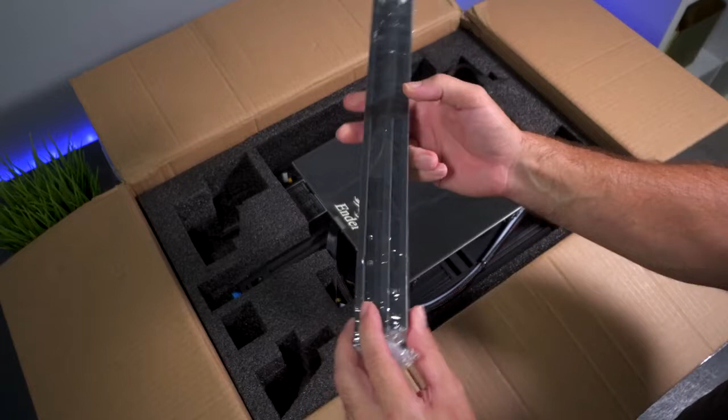All right, here we have our couple of 2020 channels. One of them is our X-axis channel, and the other one is the top brace. And here we have the hot end, and the hot end looks quite different, especially this cover here.

And we do have a silicone sock. Very interesting design, definitely looks like it would be a little bit harder to get into this thing if you wanted to. All right, for the next part it looks like we just need to take out this whole base, so the hot end is tethered to it. Try to carefully pull it out of there. All right, and that looks really nice, it's built very well. I'm gonna put this to the side for now.

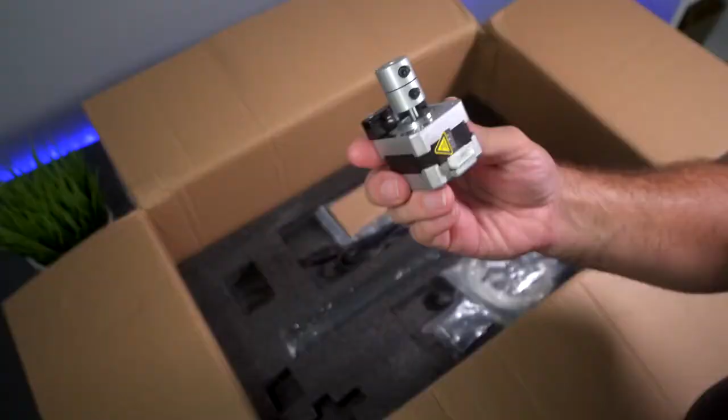I'm gonna take a closer look at it in a bit. Let's see what else we have in the package. We have another layer here of foam, and underneath we can see the rest of our pieces. So we have the Z-axis motor, and the coupler is pre-mounted. Looks like some hardware, our end stop switch for the Z-axis, some samples of filament, a belt, and the extruder knob, that's nice that it includes that, and a few more other things in there.

Here we have a bag of tools, some zip ties, snippers, and all of our wrenches that we're gonna need. A US power cord, the X-axis bracket, a small spatula which is not sharpened, but I don't think you need one for the bed that this printer has.

Well, it looks like a belt tensioner bracket that we'll have to install. And last but not least, our channels, and inside the channel there is our Z-rod, so it is inside this rubber protector. And the last part here is our two vertical channels, which is part of our gantry. And that appears to be everything for the box.

And here, guys, we can see all of our pieces, and this shouldn't be too hard to put together. So if you have any experience assembling anything, this should be straightforward. Now, at the same time, if you've never assembled anything before, this might be a little challenging. But we're gonna go step by step, and hopefully this video will help you.

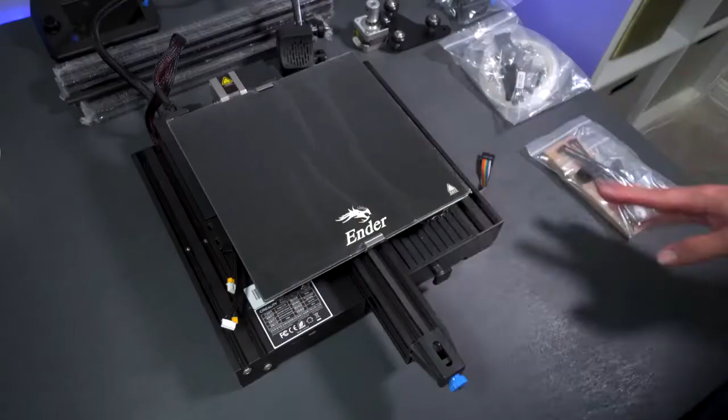But before we do that, let's take a closer look at the base. So you guys can see we have the build plate on top, and it is an ultra base type with little dimples on it where they heat up and grab the filament, and then as it cools it releases. So this is definitely a nice little upgrade here.

Some people prefer the Ender 3 Pro's bed, which is a magnetic bed that you just peel off, and it's definitely very easy and convenient, but those degrade quite quick over time if you print a lot. So this should last a bit longer and be more durable overall, as long as you don't scratch it too hard.

So there's two clips here on each side. I'm going to go ahead and take those off. They just slide right off, and that's what keeps the bed in place, which is quite interesting.

So I'm just going to move this out of the way because what I want to do is flip the printer over. And the reason for that, check out what's under here. Right off the bat, guys, you can see this is very, very well made. You can really see how Creality has upgraded everything over time.

So we have our power supply here in the back, and it's completely encased. Here we have a drawer, which is included with this printer, and we're going to open that up a little bit later. And here we have a cover where the electronics are. So let's go ahead and open this up so we can see a little closer what's inside.

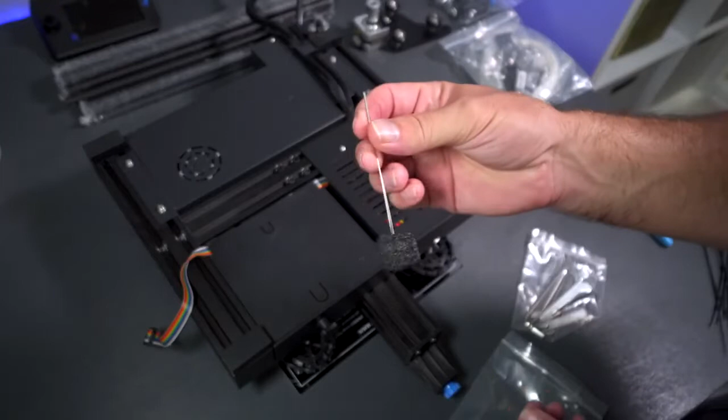So I'm going to grab my tool baggie, which has some snippers, a few zip ties, and a clean out needle. This is if your hot end gets clogged, you can use this needle to clean it out. And it looks like we have a little flat screwdriver, a few Allen wrenches, and a couple regular wrenches.

I'm going to grab a wrench from here, and we're going to unscrew these 3 bolts from this cover. And there's actually another bolt on the other side, right over here. So once we get those 4 bolts out, this lid should just pop off, and we can see that there's a fan that cools off the board.

So here we can see what the board looks like. So everything is very nice and tight in there. Looks like all of our stepper drivers are synced, and they are not removable.

And it looks like we do have an ARM processor, Creality logo, and the version 4.2.2. Yeah, so everything looks very nice and tidy, and usually Creality does a great job of tidying everything up.

A little nervous about this area here because these are very sharp edges from the cut, and the wires are kind of right on them, but they do have protection, so that should be all right.

And we do have a fuse on the board also, and a large heatsink right here, and I think that's some kind of power regulator there. So yeah, this is what the Ender 3 version 2 board looks like.

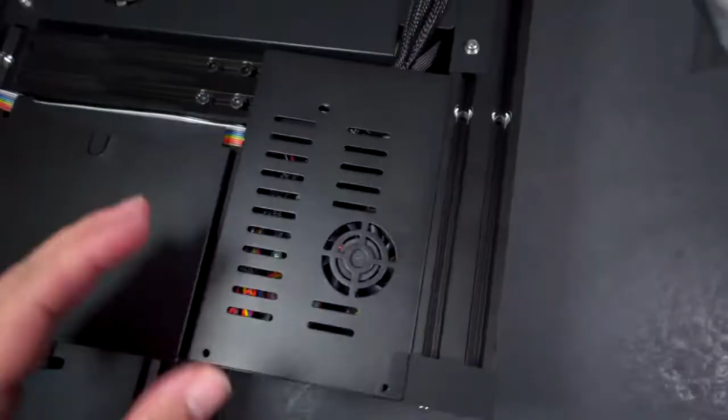Now it does feel a little tight in there. Adding any kind of mods might be a little bit hard. Alright, so I'm going to put this lid back on, and then we're going to flip it around and start putting it together. And also, guys, I wanted to mention about these feet. They're very nice. This is what Creality's been using lately on their higher end printers, and it's nice to see it here on the Ender 3.

Alright, so before we can continue with our build, we need to check a few things. Now, one of those things is the frame. Make sure the frame is sitting level. So if it doesn't wobble around side to side, that means it's quite level. Now, if it does wobble, what you want to do is untighten these bolts on each side, and that'll let it go to where it's flat, and then we can tighten them up.

But in any case, we want to go ahead and check all these bolts also. Make sure they're tight, because over time they do loosen, and they loosen quite a bit. Like this one was very loose.

printer is, the less problems we'll have in the future. Also, what's quite important, if we flip the printer around, you can see there's 4 bolts right here. These 4 bolts hold the y-axis. So if these are loose, your whole y-axis could move around. Because it's pivoting here, there's quite a lot of leverage on each end. So you want to make sure that these are tight.

So we're going to go ahead and check these. These are pretty good. And this one is completely loose. I mean, it wasn't even tight. Look at that, wow, that's crazy. This is why it's important to check this. This one is quite loose also.

Alright, so now that we know these are tight, we'll be confident that our y-axis here will not shift like this. The next thing you want to check is your bed. The bed has rollers that roll on the channel, and they're usually loose, and mine are loose. That's a good thing because you'd rather have them loose so you can adjust them right than have them too tight and wear out. And if they're too tight, they'll definitely mess with your print quality.

So we're going to grab this wrench, and hopefully you guys can see, but there are rollers right here. There's 1, 2. These are stationary, so they're not adjustable. But if we go to the other side, we can see we have eccentric nuts on this side, and this is what this wrench is for. What we're going to do is stick our hand in there and feel which roller is loose. It feels like it's that back one right there.

So what we're going to do is grab our wrench and turn it just a bit, and that should tighten it up. Okay, and that actually did tighten it up, and it seems to be about right.

Now, the way I like to check these, if you stick your finger in there and spin the roller, you can feel how much tension it's pushing on the rail. So if you twist the roller and it spins on the rail and you can feel the friction, that's how you tell how tight they are. If you can't spin the roller at all, it's way too tight. If you spin it and the drag is quite heavy, then it means you need to loosen it.

So what you want to do is get to the point where the drag is quite light, and at the same time the bed is not moving. As you can see, the bed doesn't move, but the motion is very smooth and easy. So if you feel any kind of jumpiness or anything funny, that means your rollers are probably too tight, or it means that maybe your belt is not running true on these pulleys. So we also need to check those.

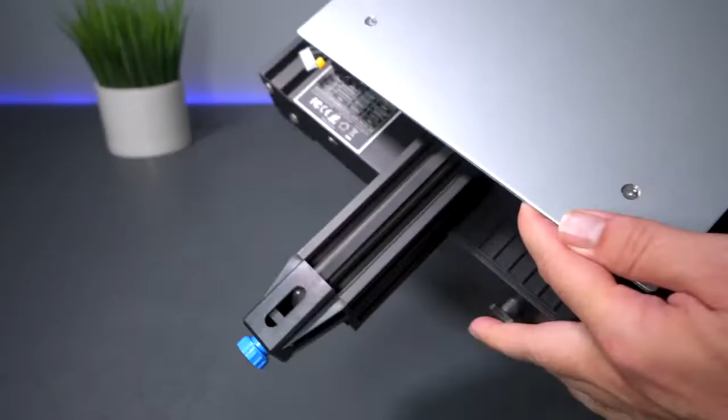Speaking about the belt, I can see here on the front we are definitely not running in the middle. So the first thing I'm going to do is try to loosen the belt completely so that it's loose. Then I'm going to go underneath the bed and make sure that the tab that goes and hangs onto the frame is all the way across where it needs to be. I'm just going to use this larger wrench and push it over, and also check the other side.

So now I'm going to tighten the belt, and we can see the belt is running a lot more true, basically almost right where it needs to be. So adjusting all these things will help the overall experience of the printer.

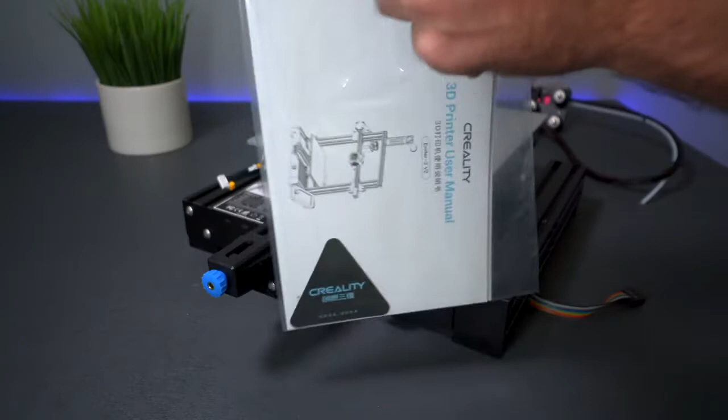All right, so I think it's time to whip out the manual. It looks like we have a few more things in there. There's an after sales warranty card and how to contact the company, and it looks like a little thank you note.

All right, so let's see what the Ender 3 version 2 manual looks like. Compared to the old days, Creality has moved up quite a bit in how they provide the information, and it's all very nicely laid out. So here we can learn about the printer and what all the parts are.

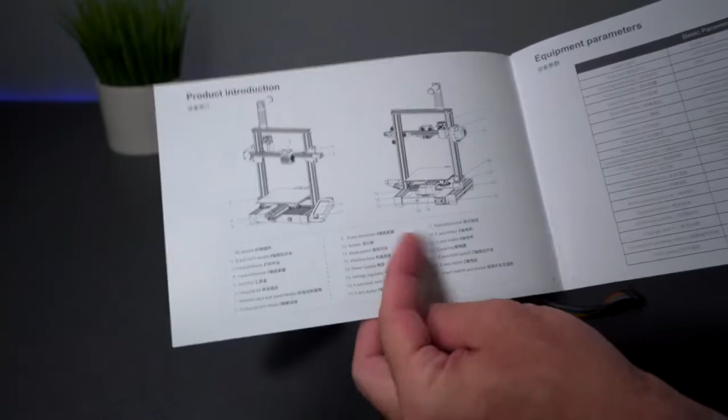Here we have the basic parameters, all the pieces that are included. You can see there's quite a few of them.

All right, and here we have step 1. Out of curiosity, there are 9 steps to building the printer, and then step 10 is bed leveling.

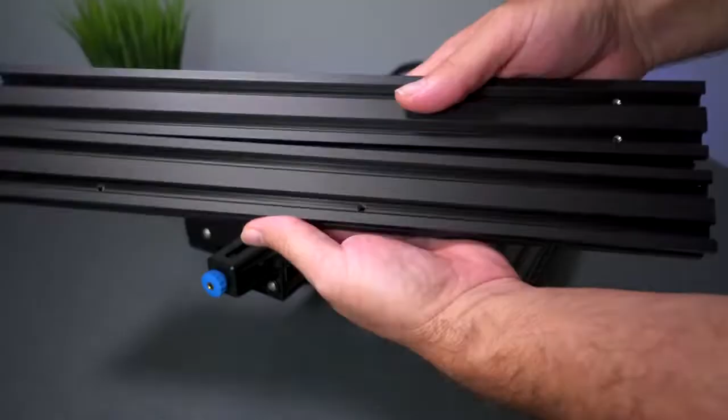For step 1, we're going to need these larger channels, and they are plastic wrapped. This is what they look like. They're actually 2 different channels. As you can see, there's 2 little holes here on the side, and then we have 2 larger holes up higher on the other one.

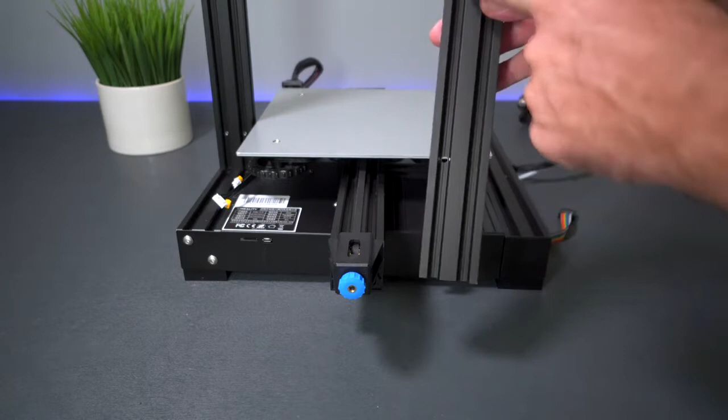If we look at the picture here on step 1, we can see the one with the 2 holes up high goes on the right side as you're looking to the front of the printer, and the other one with the 2 little holes goes down on the left side. So the one with the 2 little holes will go on this side, and the 2 separated larger holes on the right side, with the holes on the inner part of the channel, to the inside.

Let's grab our hardware that we're going to need in this bag. We have the Z-Axis switch here, and we're actually going to need this in this step also. Let's take a quick look what else is in this bag. We have some caps for the profiles, M5 T-nuts, our micro SD memory card with a USB adapter, some more bolts, and the ones we are going to need right now, which are the M5 45s, a couple PTFE tubing couplers, an extra nozzle, and some clips.

A belt for our X-axis, an extruder knob, and this is a nice little touch - it goes on top of the extruder so you can visually see it turn, and also turn it manually, kind of like a little knob. Very nice. And of course we get a little bit of sample filament that looks like to be white PLA. But we are after these M5 45 bolts, and we need 4 of them, but there are 5, so I'm not sure if that's extra or needed somewhere else.

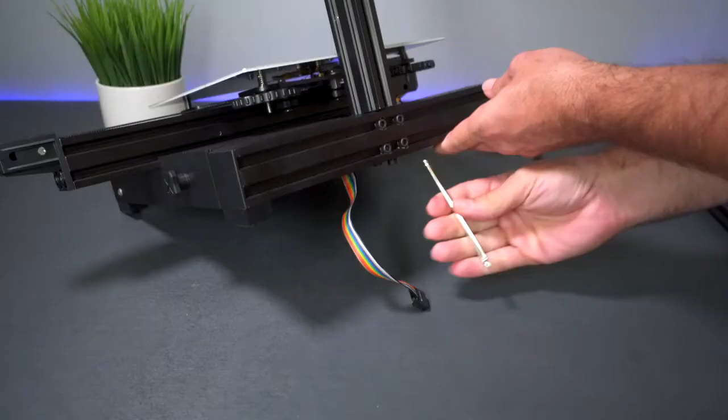We'll find out. So I'm going to remove one of the channels, and we can work on this one. What I'm going to do is put a bolt through it, put our channel in correctly like this, and start the bolts with our hand, and do the same for the other one. Grab our wrench. What we want to do here is just snug them up and not tighten them at all.

We actually want them a little loose. This is quite important because we're building out the whole frame on the upper gantry, so we want everything to be aligned correctly. I just barely snugged it, and you can see the channel still moves around back and forth and twists around. And that's what you want - you want it to be moving around at this stage.

And we're going to do the same thing on the left side, the little holes down. All right, so we got this channel snugged up, but it's moving also.

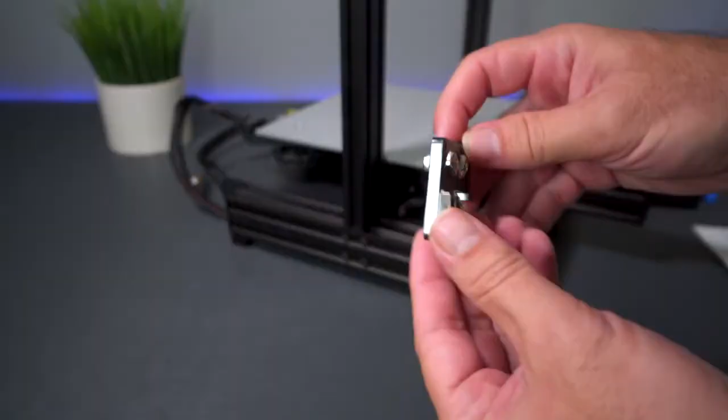So in the first step, they also want us to install the Z-Axis switch. This is what that looks like - it's in its own little separate bag, a little plastic bracket with the switch on it. If you look at the bracket, you can see there's a little nub sticking out. This part that sticks out is actually going to sit right here on top of the channel. So it goes in like this.

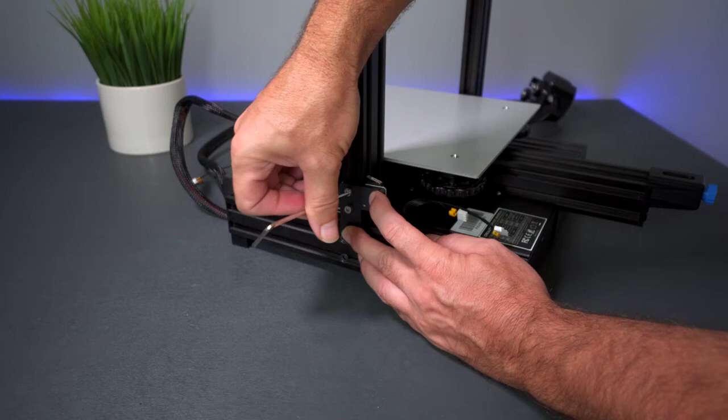There's a couple T-nuts we need to loosen up so they move around. We're going to align them up and down like this. We simply go into the channel, and go all the way down - there's a little stopper here that will stop it, and it'll sit right on top. Once you're all the way down like this, you're going to unscrew the bolt a bit and then screw it back in, and that should turn the T-nut inside the channel and lock it in. So this is our Z-Axis end stop switch.

So for the next step, step 2, we have the Z-Axis motor and rod. The motor and rod go just behind the switch here, right in the back of the channel. And here is the stepper motor, and we can see that the bracket's already installed on the back of it.

And so that simply just goes right here, and the two little holes are for mounting this motor. So we will need two M4 18 bolts, and the bolts will go through the bracket and then into the channel. Now the motor does sit a little bit off the bottom.

Now here's something to consider. If you tighten these bolts all the way, you might tighten them where the motor ends up sitting a bit crooked, because it does fluctuate quite a bit on all these parts. You want to make sure that you're not leaning side to side anywhere.

That leads us to our next step, which is putting the lead screw in, and that'll simply go into this coupler just like that. Tighten up this little bolt here, that'll compress the coupler and hold the lead screw. So let's go ahead and tighten that up.

Now the best way to line this up, what you want to do is just eyeball it here where it's level as possible to the top on this channel, and if it looks pretty close, just tighten it right there. As you tighten it, it might move, so keep an eye on it.

Alright, so our Z-axis motor is on and the lead screw is tight on the coupler. Make sure both of the bolts are nice and tight.

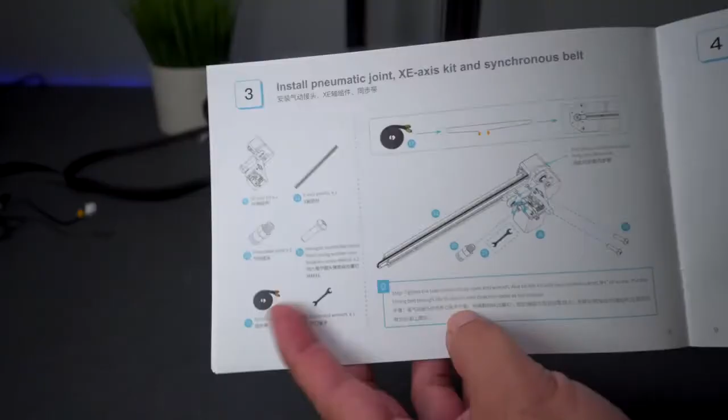So for the next part, we're going to move the printer out of the way, because on step 3 we're going to be building the X-axis assembly. We're going to need one of these 2020 channels, and there are 2 of them. One of them has a bunch of holes, and the other one just has 2 holes on each side. That's the one that goes on the top of the printer.

But this one here, this is where all of our parts to the X-axis will go on. So this is where we're going to use our extruder/X-axis assembly. We'll also need our belt, and we're going to need our M4 16 bolts. And now we can put this thing together.

So it might be a little confusing, even looking at the manual, because it is a little strange how this whole piece goes together. The best way to know which side goes where is that if you look at these little holes, the 2 that are closer together go to the assembly, and the ones that are farther apart go to the idler bracket on the other side.

So this wallowed out area here with the 2 small holes actually fits over this bolt right here. If we take our channel and go down onto the bolt, you guys can see that. I'm just going to go down just like that, and then these 2 threaded holes will accommodate 2 bolts that will go through here. So let's grab 2 of our M4 16 little bolts.

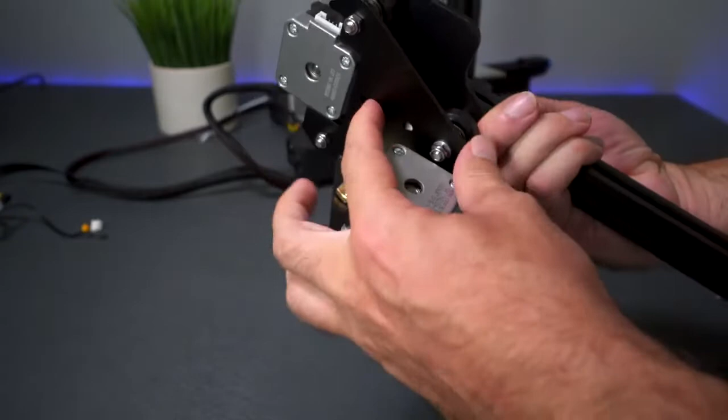There's no easy way to do this, but the bolt goes through here, and you can fit a wrench on the other end. I find that if you put the bolt through the hole first, like this, put both of them through there, grab our wrench and go through the outside here, put our channel on there, and then try to start it.

So this part could get a little finicky, but if you have a little bit of patience, it should go pretty good. And then I'm going to go ahead and tighten up the bolts really good. And that's how that piece goes on.

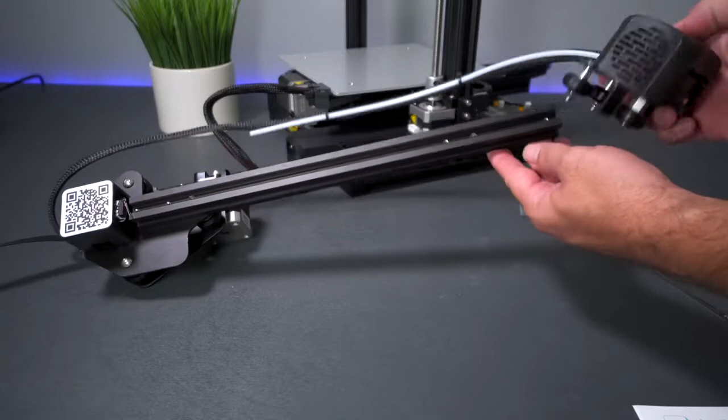So for the next part, we're going to take our hot end assembly that goes from the printer. Make sure your wires are not tangled or anything, and they're pretty happy where they are. We're going to point the tip to the bottom, and we're simply going to roll it onto the channel, just like that.

And now, working on this side, we have this bracket, and these 2 holes here are for bolts for these threads. If we flip this thing around, we can see there's another wallowed out area, and that's where this bolt fits in right here, just like that.

And here we can see where the 2 M4 16 little bolts go in. So let's go ahead and tighten those up, snug. And this is how the bracket mounts.

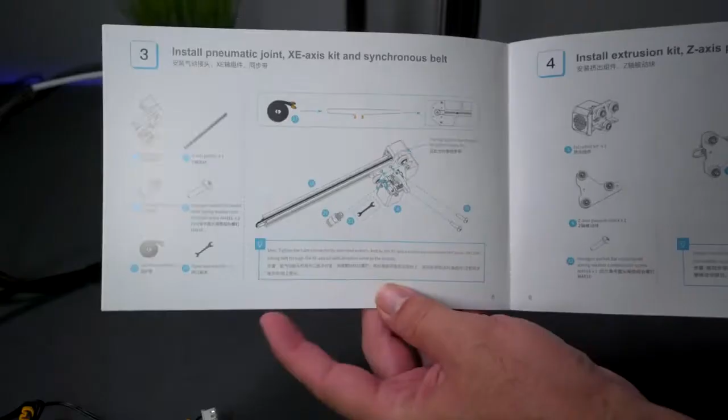Alright, so this is what our X-axis assembly looks like so far. It's not very hard to build, a little bit confusing on how to install the parts, but as you guys can see, not something that you can't do. So we've done step 3, we've pretty much done step 4.

So for the next part, let's go ahead and install our belt. This is not as hard as it seems. You're just going to grab one end of the belt with the teeth pointing down, and we're literally just going to put it right in the channel like this.

So then what we're going to do is take our hot end and run it over, just like that. When we run it over, it's going to be underneath the wheels of our hot end. Then we're going to feed this thing all the way through into our X-axis motor, and we can see it comes out from the top over there.

So now we need to grab it, and we're going to pull it out a bit. Then we're going to loop it back around underneath the sprocket, and it's basically going to come out at the other end here on the bottom. Not very hard, just go around the sprocket. So now we're looking at the bottom.

Here on our hot end, we're simply just going to go into this slot right here, just like that. So now we can pull on this other end, and that should tighten it up. Looking back on the top, this is just going to go around and then back to itself right here.

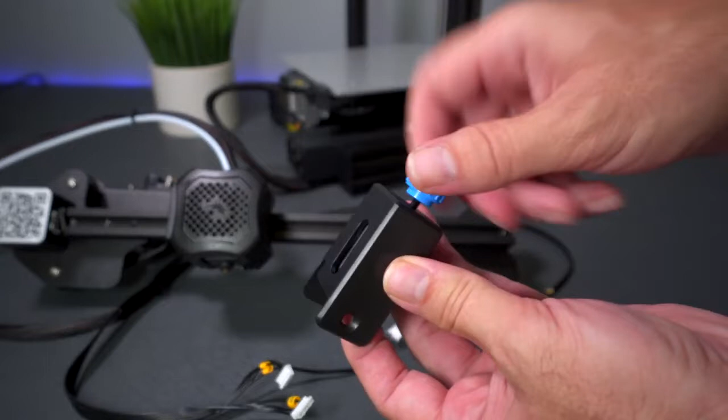But we can't do that yet because we have to install our idler tensioner here, and this is this piece right here. This tensioner pulley actually comes apart if you unscrew this knob here, and I think this is probably the best way to do it. If we unscrew it and just push it through, it should come out, and you guys can kind of see what that looks like. It has a little rail system that it slides into here, so you can't really get it wrong putting it back together.

So now we're going to take our belt and just go through the idler pulley. Before connecting the belt to the hot end, we need to go ahead and reassemble our tensioner. The way this thing goes, the smooth area here is the front, this is the top, and the longer slot is the back. So it's going to go in just like that if you're looking at it from the front.

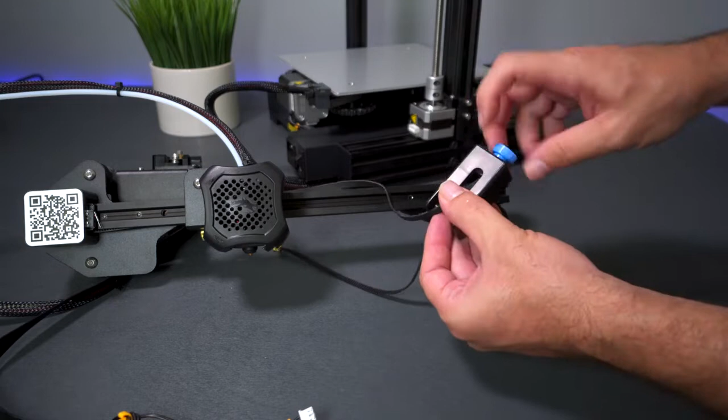Now you will need to take this bolt out if you went ahead and put it in, because this bracket here goes right over it. So what we're going to do is grab the idler and simply slide it back into where it was with our belt in it. Put our little knob on so it doesn't fall out. We're going to leave that quite loose for now, so we have plenty of room to work with.

And now we're just going to simply slide right over this channel here. There was a little bolt that was included with the pulley adjuster, and that goes in the front, so let's go ahead and tighten that up. Then our original bolt goes back into here, and we're going to snug that up, but we don't want to go crazy tight because we have plastic here. That's how the idler pulley goes on.

We're going to go around to the hot end and hook the other end of the belt into the slot, just like that. We want to tug on them just a bit to make sure they're set all the way down into the slots.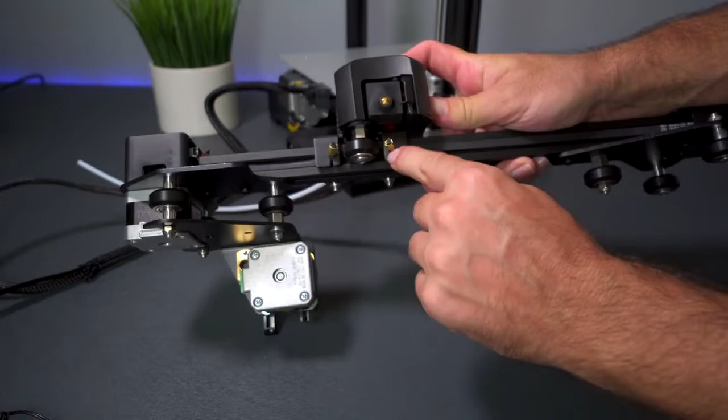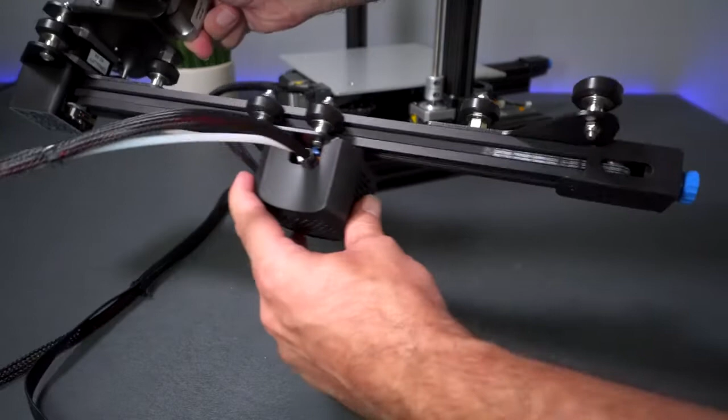So now our belt is on and we can go ahead and tension it up a bit. You want to be very light on this because you can't really tell how much you're tensioning it. Always feel the belt and make sure you're not too tight. Like I already have it too tight and I didn't even really know that from feel. So we want to run this back and forth and make sure our belt is running true on our pulleys.

So this is how the X-axis assembly goes together. We're going to grab it. Now you want to make sure none of your wires are twisted, so you may have to twist this thing back and forth, but mine looks about right where it is. These rollers here will simply go over the channel, so let's go ahead and feed them in.

Now we still have our lead screw, and we can see it right here. We need to feed it into this brass bushing, so we're simply going to line it up and then twist it here at the coupler, and we can see how it walks right in.

So making sure all of our stuff lines up, we're just going to go straight down. We can go ahead and push on this and it should go pretty straight, and here you'll be able to tell if everything is lining up really good or not.

For the next part, we're going to be installing our brace that goes up here, and we'll need our M5 25 bolts, 4 of them. If you look at this channel, there's a wallowed out part that goes to the top and the normal end goes to the bottom. That wallowed out part is for the bolt to fit in.

What we want to do here is just barely snug it. We want it to be loose still, because right now we're at a critical point where our whole frame, or the top gantry part, is adjustable, and we want it to sit in the most natural place where it wants to, where there's no binding.

Now we can really adjust everything correctly because our bottom channels here are not tight, so it's all still moving. The top is not tight, so the space between these brackets should already be automatically adjusted since we're all the way down. We need to check our wheels, make sure they're more loose than tight, so nothing's under strain.

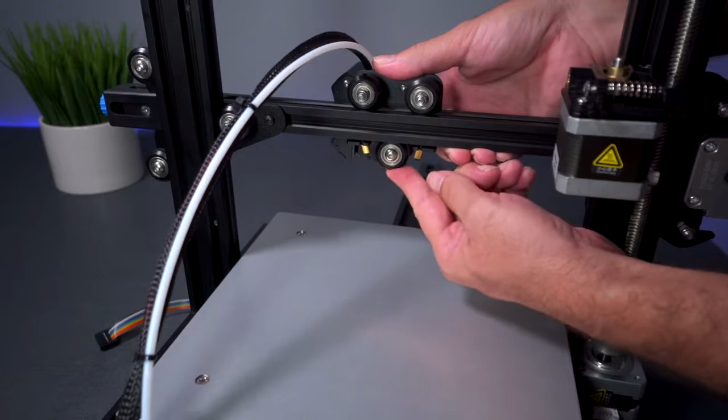So if you do need to adjust it, the eccentric nut is underneath here, and you just spin it a little bit back and forth until you get just a light drag of all the wheels. When you move it back and forth, it should have a very smooth motion — no jittering or any kind of jumping, it should be very smooth.

So we are on step 7, and we've installed the top brace there and adjusted all our wheels. On this same step, we actually installed the display, which we have right here. There's a bracket here in the back and it looks like it does pop out — that's interesting.

If you can see, there's 3 bolts with T-nuts going through there, and they simply connect to this channel here on an angle like this. We're going to grab a wrench and loosen all these T-nuts so they can move around, then line them up with the channel. These 2 will go on the bottom slot and the one here will go on the top, so I'm just going to go flush right here.

My panel will stick out a little to the front, but you can go as far back as you want or forward. So that's 2, and the third one. That is solid as a rock.

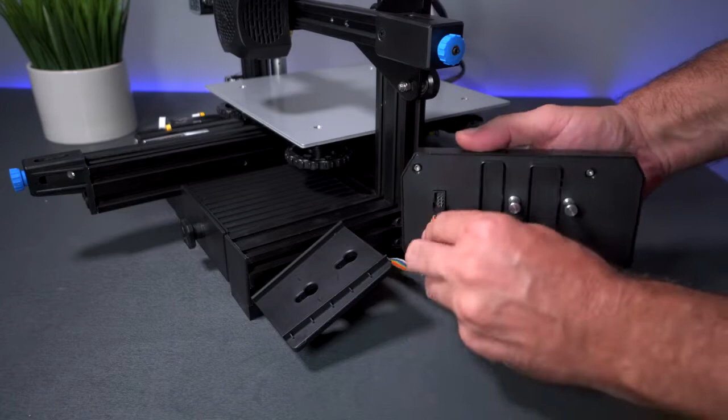Before we slide the display on, let's go ahead and plug it in. We'll simply plug it into the display like that, and now we can slide it back on just like that, and it actually clicks in. As simple as that, our display is on.

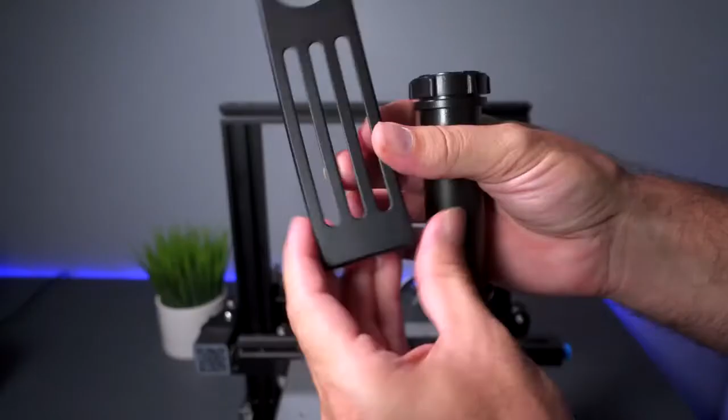So we got a couple more steps left. Step 8 is installing the spool holder, the profile covers, and the extruder knob. Let's start with the spool holder, which goes up here. The metal part faces backwards, so the nice part faces away from the front. Take the nut off the round spool part, thread it through, put the nut back on, and use your hand to turn the spool part so the nut tightens up. That's it. It's going to go somewhere over here.

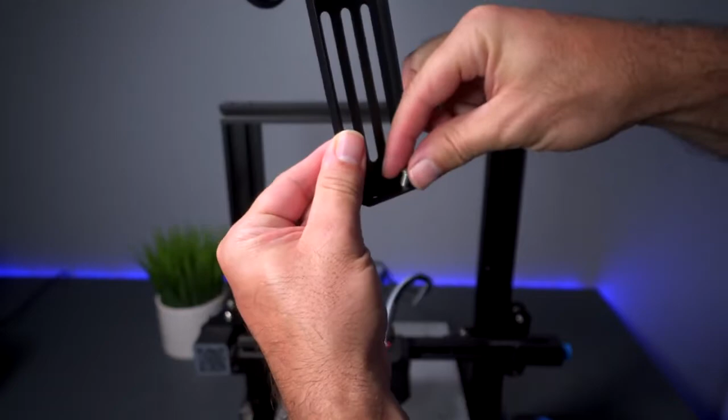Now we're going to set the T-nuts into the channel on top here, going as far as I can, and tighten it right there. We can snug these up, but don't snug them too hard because you'll damage the channel on the other end. This is what the spool holder looks like: the spool goes here, and the filament feeds into the extruder down here.

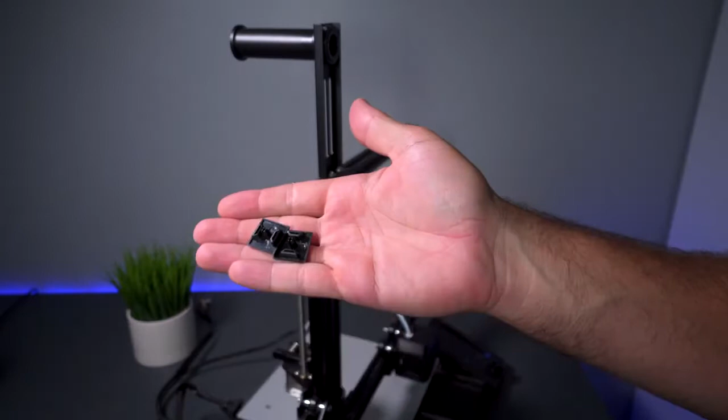While we're up here, let's grab these profile covers. There are 2 of them, and they go right here. There are sharp edges, and this is to protect the side so you don't get cut. These simply press on, and if they're not going on well, you can tap them a little and they'll pop right in. Same thing on this other side.

Looking nice. Here we're looking at the extruder. We need to go ahead and install a coupler. There are brass threads, and that's going to be a nice connection there. We can grab our wrench and tighten it up. While we're here, let's connect our PTFE tubing, simply inserting it into the coupler, whose job is to grab it and hold it.

Creality includes these little clips, a couple of them plus one extra, and you definitely want to use these. Spread these 2 pieces apart, then put this clip in here just like that, which ensures it locks in really good and the PTFE tubing won't be moving around.

You can go ahead and install the knob. If you noticed, on the bottom of the knob there's a little flat spot, and on the motor there's also a flat spot, right there. So line up the 2 flat spots and insert the knob just like that. Now we have a little knob we can use to push filament in and out, and while it's printing, this thing will be spinning so you can see that it's moving.

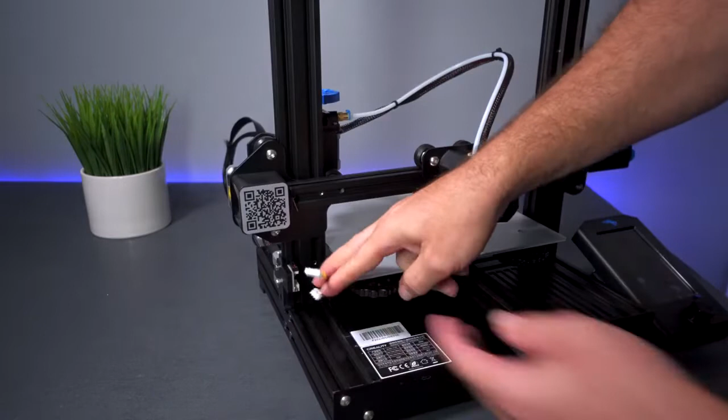We're really close to being finished assembling everything. The only thing left is to plug a few things in. Here in the front, we have a couple plugs: one is the motor, which goes to the back, and the smaller one is the Z-Axis switch, and they're labeled. There's a little yellow label that says Z on here. The switch clicks into here, and the motor wire we send to the back and connect right here. It's actually quite a tight fit, but it does reach, and that's how it goes.

So on the back of the machine, we have a few more wires.

Since our hot end is already connected, we don't really have to do anything there, but we do have this other flat cable here that comes out that has a few more plugs, and they are labeled. This one says E, X, and X also, which is a smaller one for the switch. The E is for the extruder, and that simply goes right here. And then the X, the larger plug, is for the motor, and that clicks right underneath.

But the X switch is actually inside this housing here, and you can maybe see it, but it's a little hard to reach, and it clicks in right there. So this is where all these wires go. And the wire that comes from the hot end actually has a little place where it can clip in right here, where it's kind of held.

But yeah guys, that's pretty much it. So all of our wires are already connected, so everything else is connected. And we're pretty much good to go, except for one thing that's very important, and that is in the back of the printer. You can see right here, that is the voltage setting.

Depending on where you live, you want to switch that to the right voltage. So I need 115 and it's on 230 right now. I'm going to go ahead and switch that. Make sure that you check this before you plug your printer in. It's very important. So yeah, that is everything with the assembly.

Now the only thing we got to do is put our glass bed back on. So the build plate is glass. There's a little protector on top of here. And we can see we have that ultra base style coating on it. And we get a nice little Ender logo here.

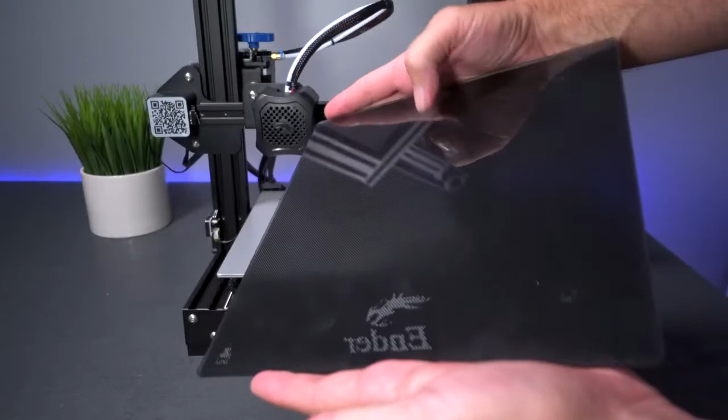So you do have a choice. You can print on this or you can print on glass. It has glass on the other side. So we're definitely going to be using the ultra base. I really like this stuff. When it's hot, it grabs the filament, and then when it cools off, it just pops right off.

Now the interesting part is these clips here. To me, this seems a little bizarre how the bed is held, but I guess we just clip it back on like that on both ends. And that should be good enough. It seems like it's holding really good. It's a little bit unusual, but in any case, seems to be fine. And it looks really, really nice.

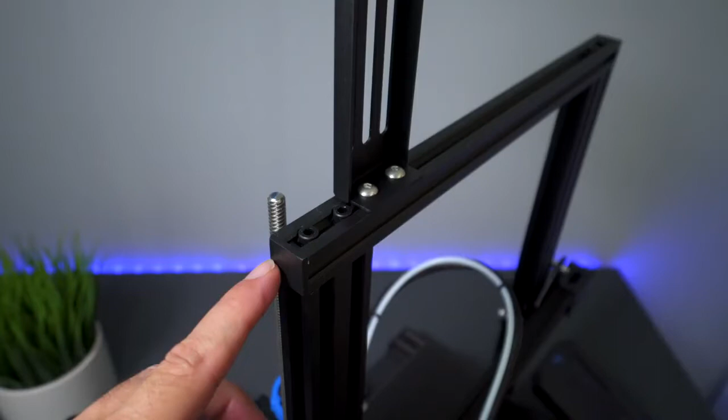So before we plug it in and power it on, let's go ahead and take a closer look at all the features. Starting up here on the top, we have the spool holder. I just realized that you could probably move it even more farther this way and put it in between this bolt right here. So I might do that.

So up here, everything's quite basic. We move to the back, we can see the lead screw just kind of hangs there. There's no support here. As we go down, we can see our extruder with the extruder knob and the motor underneath. And as we go this way, we have the X-axis motor.

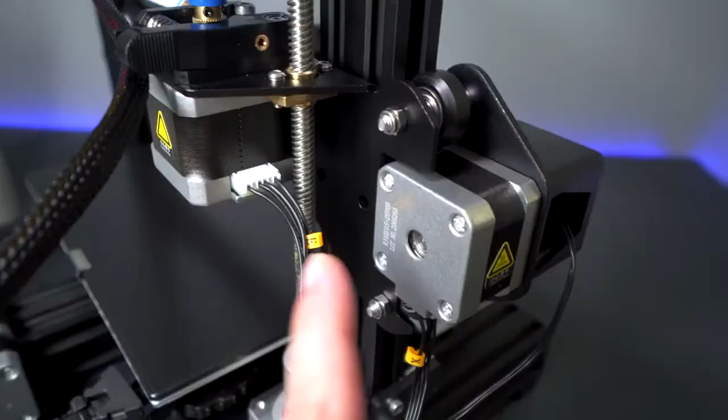The X-axis switch is in there. The X-axis rail with the hot end riding on it. And the X-axis tensioner over here. As we go down, we have the Z-axis motor and our switch that we installed. And at the back, we have the Y-axis motor.

And then there's this enclosure here that kind of hides everything, which is, I guess, good, you know, not to get anything caught in there, but not very good for servicing. Now, there is a little bolt right there that you take out, and all this comes off, and the Y-axis switch comes off with it. So good for safety, but maybe not so good for serviceability.

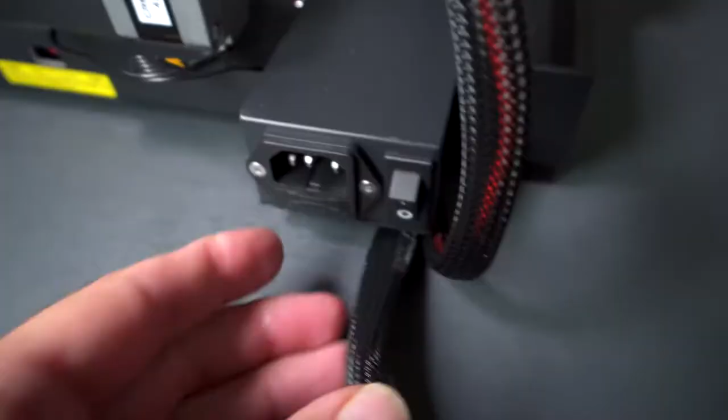And as we go down, we can see that's where our switch is for the voltage. By the way, the power supply is a Mean Well, and it's this whole piece right over here, so it's part of the structure of the printer. And over here we have the power inlet socket with an on and off switch, and the socket is fused. It's kind of an interesting design because it kind of protrudes out here to the very back, but definitely a pretty nice look overall.

So the bed is heated, and this is the wire that comes out of it. It looks like it's strain relieved somewhat, and the strain relief just hooks up to one of the legs on the bolt of the bed. And I like how Creality uses these cable protectors.

They're quite nice and premium feeling.

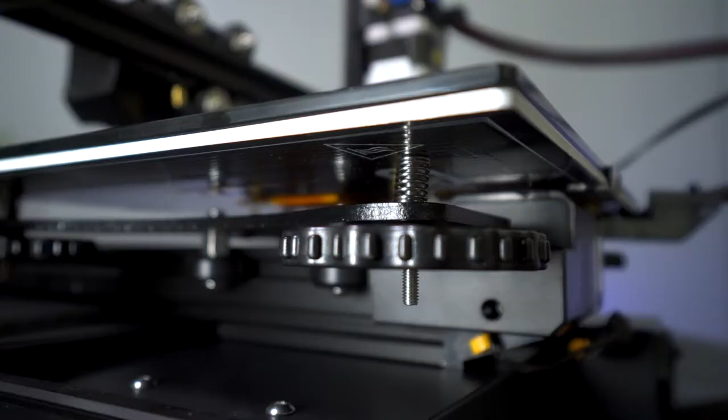So as far as the bed is concerned, we have the glass on top, then an aluminum sheet, which is the heating element underneath that. It's not insulated, but technically that's not really needed for this bed size.

So we have 4 large adjustable knobs. As we go this way, we can see we have the display here, with a cable running out from the bottom. And I definitely like this feature that you can pull it off, so this might be useful to some people.

So a pretty large screen on this display. We have a protector here, let's go ahead and peel that off, and we'll check out shortly what it actually looks like.

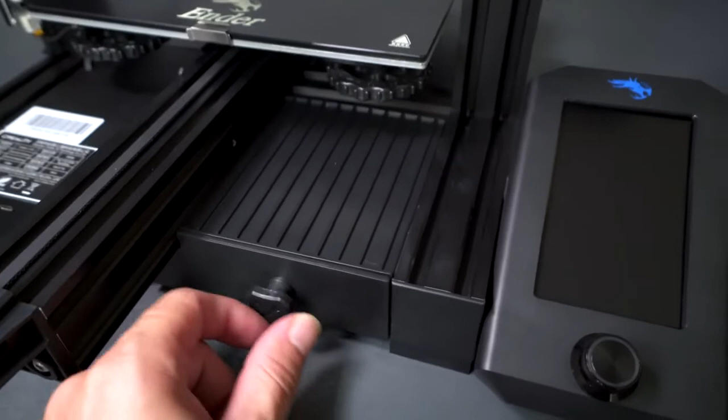As we go this way in front of the printer, we can see we have a little drawer here. The old Ender 3 didn't have a drawer, but you were able to print something to put in there. Here they included an actual drawer, and it's enclosed. You can store all your tools and little things from this printer, and it does completely come out, which gives you additional storage on the side and the back. There's a little nub that locks it in when you close it so it doesn't pop out. Very nice drawer.

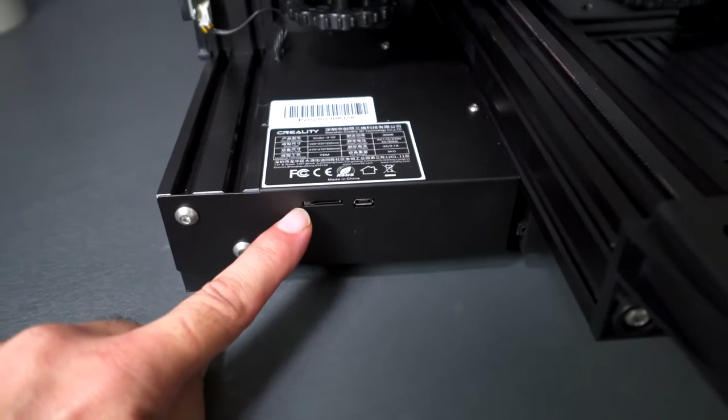As we keep going this way, we can see this is where we're going to plug in our micro SD card, and this is our USB connection. Just above that, we have the specs of the printer. We can see it's Ender 3 version 2, the power supply, and the print size, which is 220 by 220 by 250, and it weighs about 8 kilograms. So yeah guys, that's pretty much the printer, and as you can see, Creality really fixed all the issues the earlier version had, and even improved on the Pro version, giving us this version 2.

Alright, so let's plug our power cable in. Make sure your voltage is set to the correct setting. I'm going to hit the power switch, and we should power on, and there we go. We got a Creality logo in the load bar, and there it goes.

The next thing we need to do is home the printer and check to make sure all of our axes work. Before we do that, we need to run the bed down as much as we can, or a good amount, because you don't want your nozzle to hit the glass. Another way to check that is to push it down to the end stop switch, since that's where it's going to stop it, and you can look underneath to see if you just have an air gap, and we definitely have one.

Alright, so I'm going to use this rotary knob here to select prepare, and then auto home, and there it goes. All right, so it looks like everything is working, and there goes the Z.

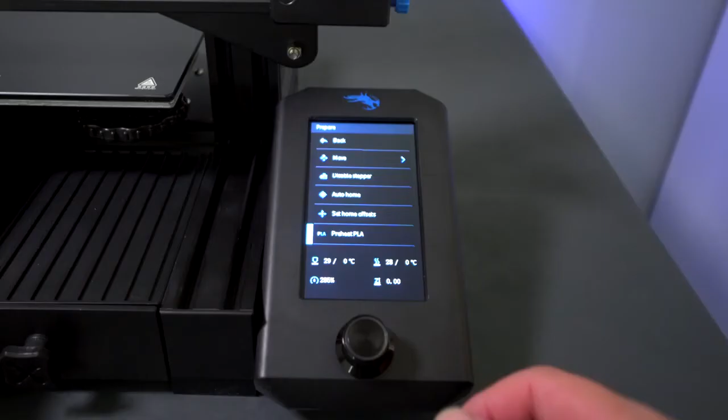So here, guys, you can see the display a little better, and it's very nice. I love this control knob, it's very responsive, not laggy or anything strange. Everything is very quick and laid out on this nice screen. On the bottom here you can see we have information, which is the hot end and then the bed. It looks like the speed and then the Z-axis, and I think that's fan speed.

So it doesn't appear that this printer has a leveling assistant, so that just means we have to level the bed manually. What you're going to do is go to auto home, and once that homes, you can go to disable steppers. When we do that, we're able to move the hot end. You will have to be very careful with the Z-axis coming down because it moves quite easily.

So you're going to need a sheet of paper, I'm just going to use this Creality thank you card. What we need to do is level the 4 corners. We're simply going to go to the corner, but you don't want to go all the way to the edge, and get that close. Then we go to the other side, get that close, and do the back corner, then go back to where you started. You want to do this a few times until it's all close, because every time you change it here, it changes somewhere else.

So you definitely want to go around at least 4 or 5 times. Now when you think you're really close, what you want to do next is preheat the bed and hot end.

So here under prepare, I'm going to click on preheat PLA, and we can see that's going to go to 185 on the hot end and 45 on the bed. So as that heats up, let's go ahead and home again, because we want to make sure we have the right offset on the Z-axis. Then we're going to disable the steppers, and as that's heating up, we should be able to get our final adjustment in, which is going to be very slight.

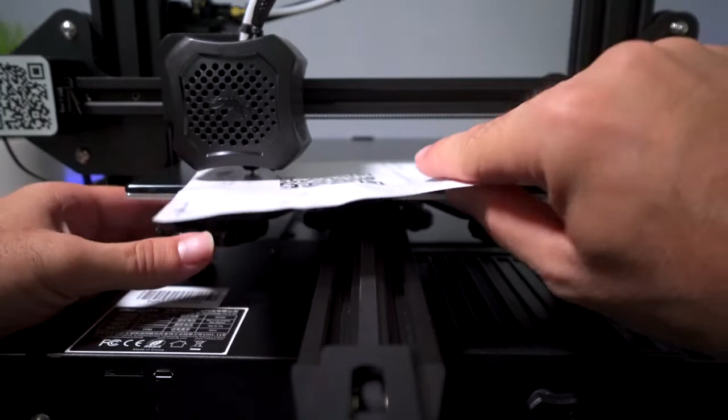All right, so the bed is hot and the nozzle is hot, and it looks like we have a very close measurement right here. This is roughly how you level the bed. Now take your time and do this right. Even if it takes you 15-20 minutes, just keep doing it. Go over and over again until you know that every corner of the bed is as flat as it can be, and keep homing it. That way your reference is correct.

So let's take a quick look at the display. This is the home where it starts. You have the Creality logo up here. Then we have print, prepare, control, and info. The way you toggle between those is you just rotate this knob, and you can see it all moves around. On the bottom, this information stays as like a little dedicated dashboard.

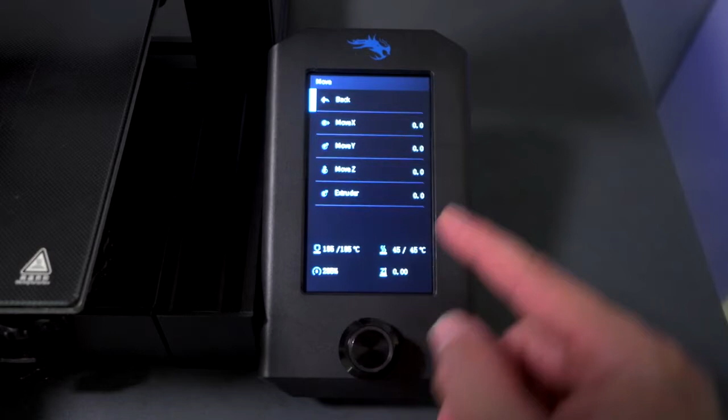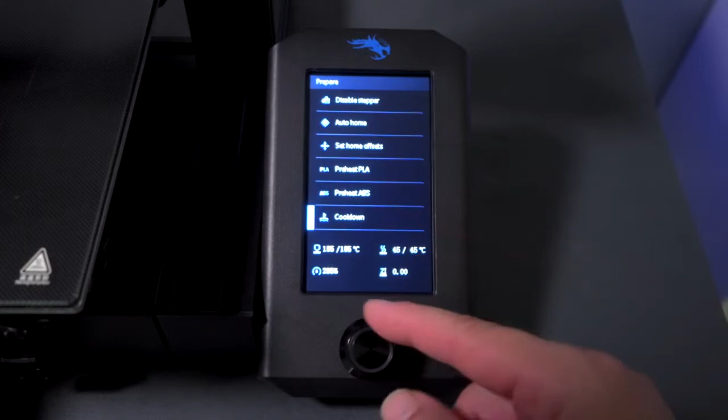So under print, this is where we're going to print our files once we insert our SD card. Prepare is where our tools are. So we have move - you can move all the axes, including the extruder. Disable steppers, home, set home offsets, preheat PLA, preheat ABS, cool down - this is going to cool down the bed and the hot end - and then language selection, which we have English here, or Chinese, 2 options.

So let's go back. Here we have control, so we can control the temperature. You can actually set the preheat settings right here, so for PLA you can adjust that as you want. So let's say we'll adjust the bed to 50 instead of 45. You can also set the fan speed here, and then we can save the parameters by clicking on the bottom. And that's it, so that's these options here.

So then we have motion, and here we can set max speed, max acceleration, max corner, and transmission ratio. These are more advanced settings, so if you know what you're doing, you do have these options. Store configuration, read configuration, and reset configuration - we're going to leave all these alone. Let's go back, and then we have info, and this is about our printer.

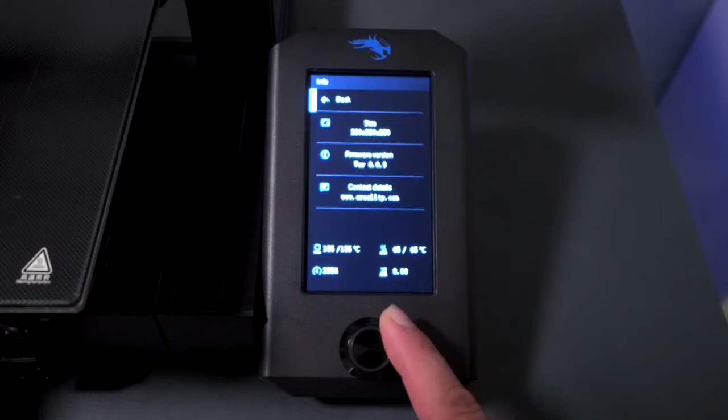All right, so yeah, pretty basic and very intuitive controls, and I'm definitely loving the navigation and the UI. Very nice. So for the next part, let's go ahead and put in our filament.

So I'm going to use this roll of blue Overture PLA, and this is where the spool is going to go. We're going to take our filament and put it straight into the extruder arm right here. This arm does release once you push it, and you definitely want to cut your filament on an angle - that way it can feed in a lot easier. But what we're going to do is just push it into the gear, and then we can use our extruder knob here to push it the rest of the way. As we feed it through, eventually it's going to go all the way through the tube and then out the hot end. And there we go.

So I met some resistance. So now I am pushing in the filament, and we can see it coming out the bottom.

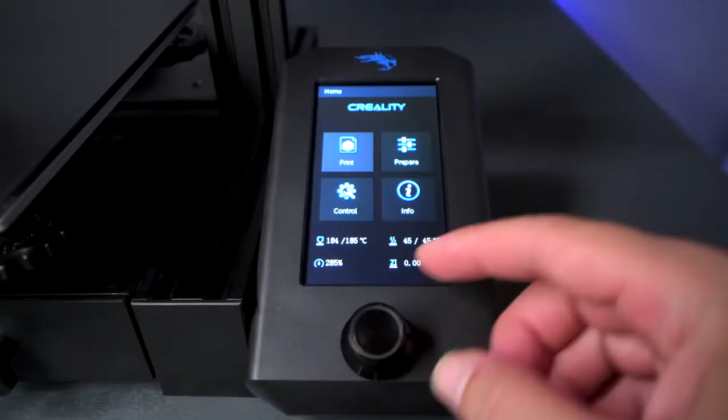So now let's go ahead and grab our micro SD card, and it is an 8 gig, and we're going to insert it into the slot upside down. Now if we click on print, well, that's kind of odd - there's nothing on the card. I tried to restart the printer and reinsert it, but maybe there's nothing included. Usually they include like a test model or 2.

Okay, so maybe we should pop this into the computer and see what's on there. Alright, so here we are at the computer, and here I have the SD card open, and this is what's on it, and sure enough, I don't see any models on here.

So the first thing we got here is our PDF manual, and then our software. So if you wanted to use the Creality slicer, you do have that option here. And if we look here, we see some G codes - so we have a cat, a dog, and a pig.

So these are all STL files. Yeah, they give you a few things here that you can print. Here it looks like we have a little video of how to put this thing together, and some other file here. So instead of using those models, let's go ahead and slice our own model in Cura.

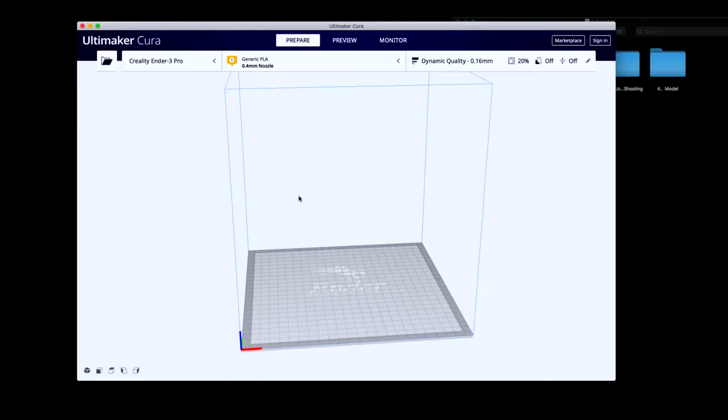And I prefer using this slicer here, so we're gonna go over real quick of what to do. If you're new to Cura, you're gonna download it. Then you're gonna be at this area here where it says add a printer, and you're gonna click on non-network printers, and you're gonna go down to Creality, and it's alphabetical.

The shell, I like to have 20% infill usually is good, 200 on the temperature, 50 on the build plate, 45 on the speed. So we got 6.5 millimeter retraction at 25 millimeter speed.

So everything else is quite basic. Now the only thing is here is I use skirt instead of anything else, and I have 3 lines going around the model. So that's pretty much it, it's quite basic. A lot of people ask me for my profile, but my profile is nothing special, it's pretty much just general. I normally don't depend on the profile setting as much as I depend on the printer itself.

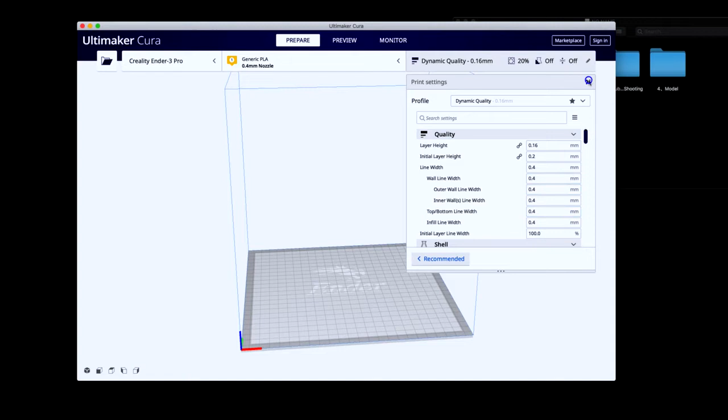So let's go ahead and grab a STL model and drop it in. So we're doing this calibration cube, and we can see it here on the platform. If you select it, we can move it around in every direction, and you can enter these manually. You can scale it up and down, rotate it around, mirror it. Here you have more advanced options.

So when you have all these parameters where you want them, all you're gonna do is click the slice button, and it's gonna slice it. According to our slicing, it'll take 41 minutes and 5 grams of filament. If we click on this preview button, I'll zoom in here a little bit. Here we can see every layer and how it's gonna print. We can see that that's our skirt, and then it starts printing the model.

So now we can go ahead and save it. Cura sees that we have the micro SD card inserted, so we can save it straight to there. I'm gonna click that, and we can eject it from here. And now we can go to our printer and print this little cube. As you guys can see, Cura is not very hard to use. If you want to learn more in depth of how to use the slicer, there's a lot of good videos out there.

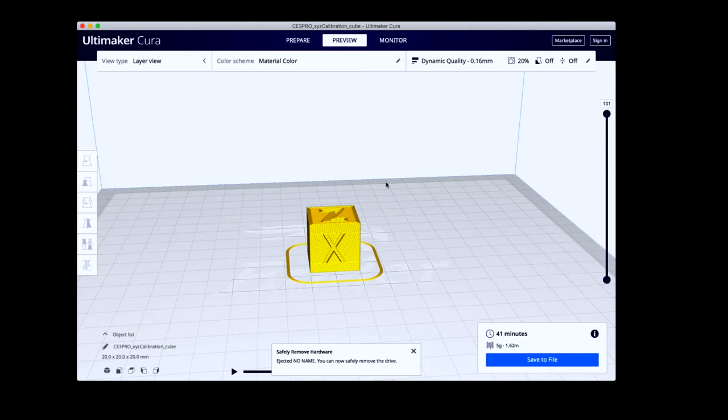All right, now that we sliced the file, let's go ahead and print it. So we have a calibration cube right here, it says. I'm going to go ahead and click it. Grab this little booger here. All right, so it looks like it's ready to go.

So let's hope our offset is going to be all right. Okay, and it looks pretty good right off the bat, as far as I can see. All right, well, it looks like the offset is just right off the bat.

So naturally, as we're printing, our screen here changed a bit. So on the top here, we have the file that we're printing, the progress bar, and the percentage that's finished, the printing time that's passed, and the remaining time, which looks like it doesn't know at this point. And we do have a few options here that we can tune with - so we have tune, pause, and stop.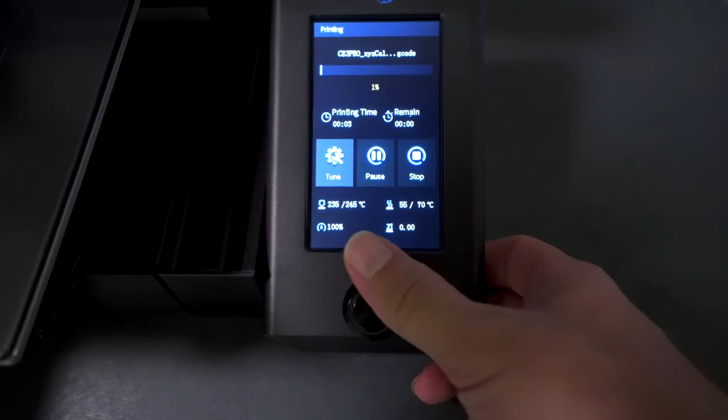So if we go to tune, we can see we can adjust the print speed, the nozzle temperature, the bed temperature, the fan speed, and the Z-axis offset, which we could do on the fly. Look at that, that's pretty cool. So yeah, very basic and good options.

All right, so it looks like our print has successfully started and everything looks good. By the way, guys, the printer is quite quiet except for the fans. You can hear there's no stepper driver noise, but there is quite a bit of fan noise, coming from all around, including the bottom. You guys can see our extruder knob there turning, indicating the filament's going in.

Well, I'm pretty excited to see what the calibration cube will look like. I have really high hopes for this printer. Compared to the Ender 3 and the Ender 3 Pro out of the box, this thing should give us a much nicer finish.

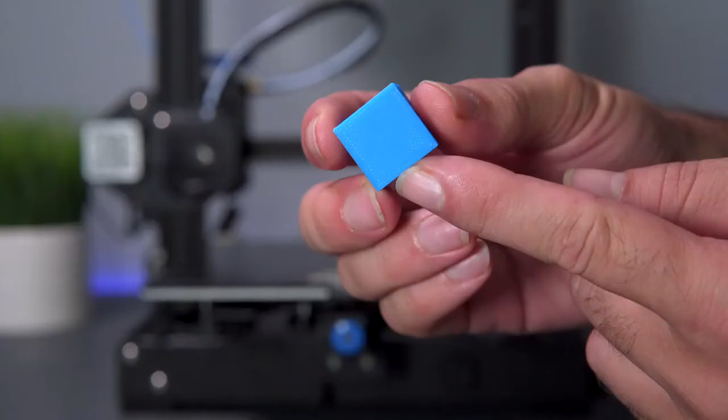Alright, our first print is done and it looks really good. So let's go ahead and try out how this PEI bed works. When it heats, it really sticks, and then as it's cooled off, it should pop right out. It is quite cool right now, so I'm just gonna push on it. It just comes right off, no problem. And we can see our bottoms are very nice because of that type of bed.

The top is looking also very good, but what's more important is going to be our X and Y axes. The Z is looking really nice. There is just a slight hint of layering, but it's very minor. Here's our Y wall, very minimal vibrations. And here we have the X, also very nice, no ghosting it looks like, so very accurate.

Now, after running the machine for a bit, we want to double check everything again. We want to make sure our belts are still tight, and they might have loosened up a bit actually, so we need to tighten them up just a bit. Same thing for the Y here, also need to tighten that a bit. As far as our first print goes, a very reasonable one indeed, it seems like it did great overall.

I'm going to go ahead and print a Benchy also in this color, and we'll look at it a little closer.

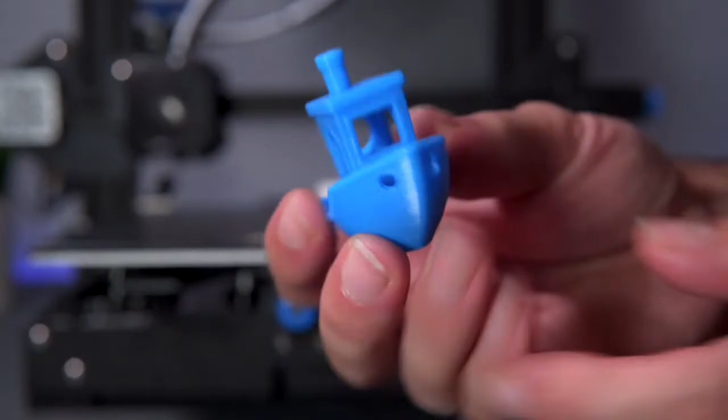Alright, so the Benchy is done, and I actually printed one more thing, which is this gear here. Let's take a look at this Benchy first, and the Benchy actually turned out better than I thought it would, and I think it had something to do with me tightening up these belts a little bit. I think they were not as tight as they needed to be, and so here you guys can see the Benchy is looking a lot better.

If you look at that wall there, it looks very nice. On this wall here, there's practically no ghosting or ringing. There's a little bit right there, but on this wall, there's a little bit more, you can see right there. So the ghosting did appear, and maybe I over-tightened the belt a bit. We can see there's a little bit of vibrations in the walls, but it's quite minor.

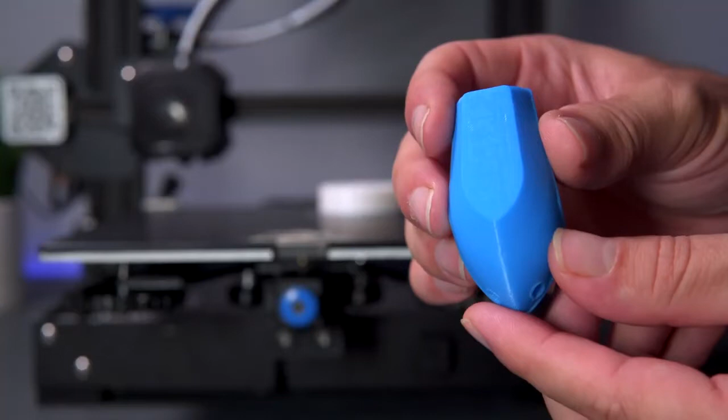Our cooling is quite decent. Here in the back, we can see the 3D Benchy wording there, that turned out good also. So overall, a pretty nice print and quite respectable, and our bottom is looking very nice. So I'm quite happy with how it prints out of the box.

It's in there, and look at that, it just pops right off. I'm glad Creality went to this bed style because overall, for pretty much all your prints, it works out really good.

So I printed this gear in white PLA, and we can look at the walls here, they look very good. So I haven't spun this at all, let's go ahead and try it here. And it's not turning easily. Oh, there it goes, just need a little push. So very happy to see that.

And this is the gear that's a little harder to print because it has 6 little gears inside, requiring a little better tolerances. So just as expected, Creality always does a great job when it comes to tolerances and the overall print quality.

All right, so I'm gonna go ahead and print a few more things, and then we'll take a closer look at that.

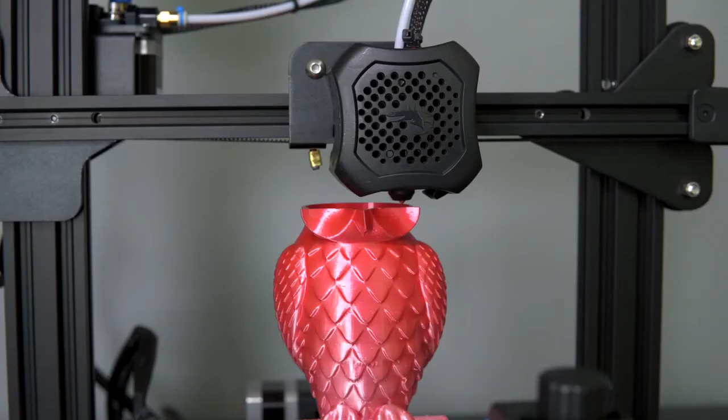Alright guys, so I printed a few items and they all turned out very well. First things first, what I wanted to show you is the calibration cubes. This blue one we printed right in the beginning, and this black one here I printed at the very end. It was the last print, and it looks like we got a little better quality.

You can see here on the X, we got very minor vibrations and pretty much no ghosting. The Y has a little bit more vibrations, we can see, and again almost no ghosting. So here's our X wall and our Y wall.

Also pretty good. Now if you notice on this filament here, we don't have so many lines like we did in the blue filament, so it could have been just the filament. But either way, I just wanted to show you guys that the print quality is very good.

And that's our bottoms there. So with that out of the way, this owl here was on the SD card and I sliced them. By the way guys, all the prints that you're going to see are in 0.16 layer height at 50 millimeters per second speed.

So this is a rainbow filament, and it started out this orangey gold color and then went to this pinkish, and then to darker orange, and then back to the lighter up here. So it turned out okay overall, not as good as I wanted.

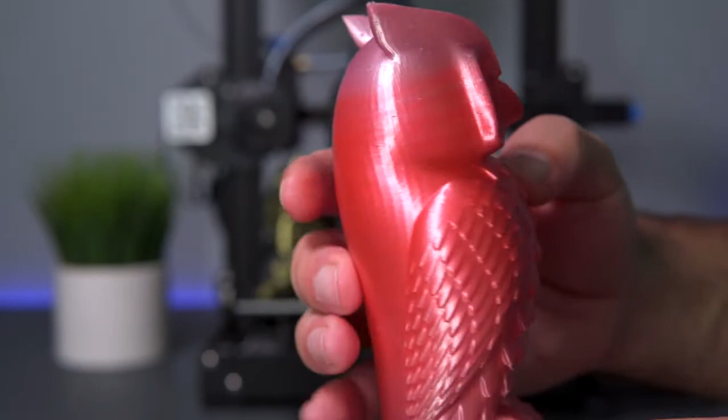It's just this model, it's not scaled very well, and this is the size that it was on the SD card. I probably should have made it smaller. And it did have random layer stitching, so the little dots are everywhere, which is the mistake I made also.

And the slicer, you can choose how you want your Z seam to be, so this is random here. But other than that, the print is very nice. I did have an issue up here, which was retraction was not enough, so I ended up bumping up the retraction all the way to 9 millimeters, and that seems to be about where it's okay. So yeah, not a bad print and about what to expect.

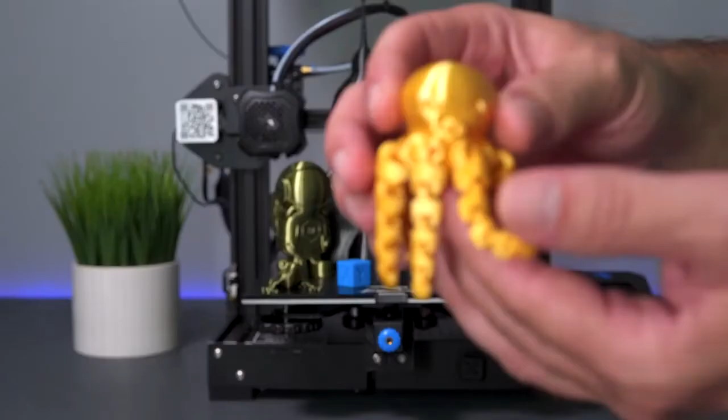So after the owl, I wanted to print a little bit of something that was precise and delicate, and it is this octopus here. This is printed in silky gold, so it turned out really nice. You can really see on his head how good the filament is sitting. And on this model, you can see where the seam goes in the back.

So yeah, it turned out very well, and these little feet here, they're really tiny and they have linkages, and there was no issues whatsoever. Once this thing printed, it just popped right off, no problems. So that just shows you how well this type of build platform works.

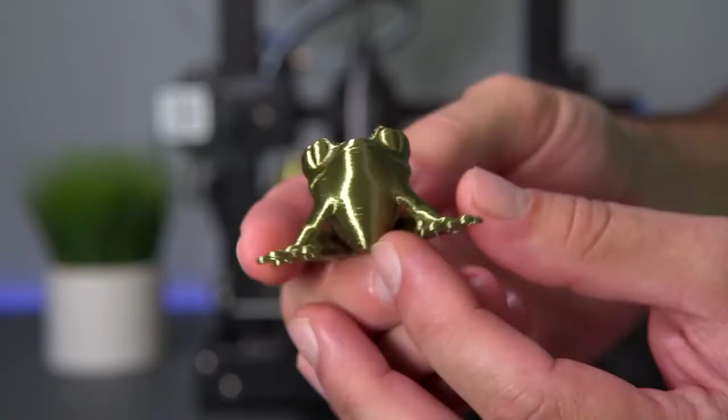So the next print I printed is this little frog, and this is in silk bronze PLA. This little froggy turned out very nice also. I like to print this little frog because there's a lot of interesting curves and it's very small, so accuracy has to be good. As you guys can see, overall it turned out quite nice.

Now over here under his arms, we did have a little bit of trouble, and I think that is cooling maybe, but other than that, he turned out quite well. Now again, on this print, the seam was random, so that's why you see all those little dots everywhere. But yeah, as far as layer adhesion and how well the layers go together, it's excellent.

Now, how can I make a 3D printing without printing my two favorite items, which is this astronaut and the spaceship? Let's take a look at the astronaut first. So this is the same filament as the frog, and as you guys can see, it turned out very nice.

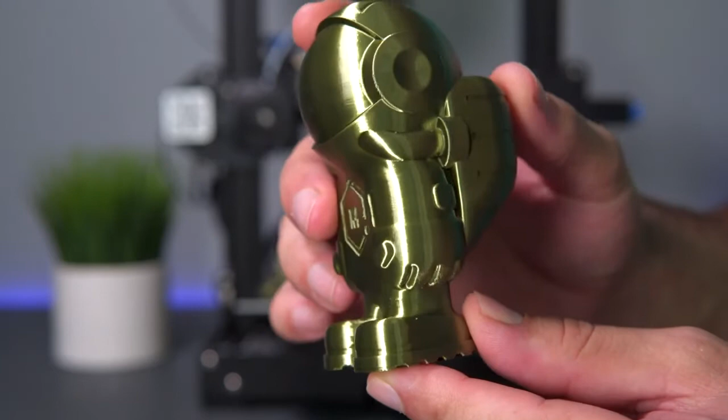So you can really see how the layers sit, and especially here around his shoes, you can see how well the reflections are. So yeah, the layer adhesion is excellent, practically no layer shifting or anything funny. Now there is a slight vibration in the print, you can kind of see it, but it's not heavy at all, very light.

Now what's hard about this print is that it has a very low surface area. It was still able to hold on to the bed the whole time and finish the print without popping off. So yeah, as you can see, the quality in the prints are very nice.

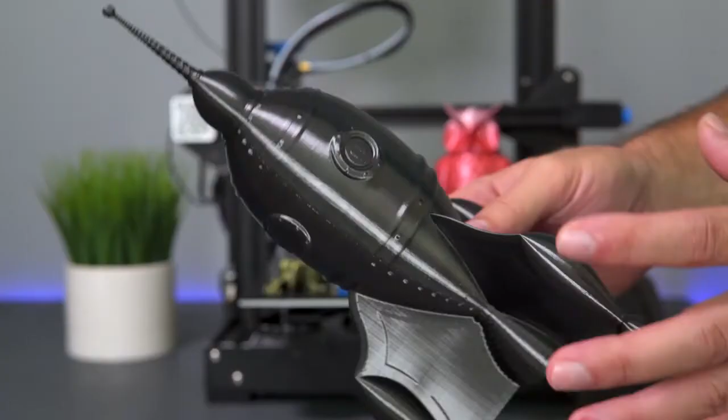All right, so last but not least, we have the spaceship, and I really like printing this thing because it does a few things. First, we test the spiralized mode, which is one layer all the way around, so this thing's very thin and hollow. And also we test the full height of the printing area, and this is almost 250 millimeters.

And so you can kind of get an idea how tall you can print. The bottoms, as usual, are looking excellent. And by the way, this is silky black.

Now there is a vibration, and you guys can see it in the reflections here. They're not the kind of vibrations you can really feel, they're very minor. But if we look at the rounded parts, we can see how nice the layers sit there. So overall, it looks really good.

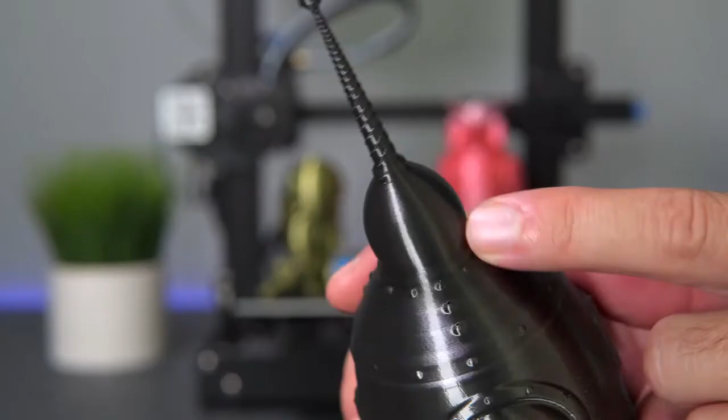There is a slight vibration, but the model still looks amazingly well, and it seems to do a lot better when it makes more smaller circles. Up here we have the point, and I'm not sure exactly what happened here, but there's like a little twirl that goes all the way around, even on the ball.

It seemed like maybe something with the G-code, but in any case, it did go all the way to the ball and finished it, and nothing melted. That was the impressive part. It's nice to see that it can print these thinner kind of areas.

So yeah guys, overall, as you can see, the printer prints very nice, and definitely better right out of the box than the original Ender or the Ender Pro. Now with that said, it's not perfect for sure, and one of those things is the spool holder all the way up there, so I definitely would move my spool holder down to the side.

Also, as nice as these belt tensioners are, I find them a little hard to tune the belt just right. It's something to get used to for sure, and I just feel like there's not enough feedback as to how tight they are. But that looks like it's going to be staying, because a lot of the newer printers are starting to have these.

The display control unit is excellent. This is definitely one of my favorite parts about the printer. The navigation is just flawless. The screen is bright and just gives it a very premium feel.

The drawer under here is a great addition to this printer, and as you guys can see, I have all the parts from it already in there. I also love that they included the silent stepper drivers now, so the printer is very quiet. Now it does still have pretty loud fan noise, so that's something that maybe could be addressed in the future.

So yeah guys, overall I think Creality knocked it out of the park with this printer, and with all the features it has as a budget printer, it seems like a really great value. So if you're just getting started and want to get into printing, this is definitely a good printer to start with. Now there's assembly required, but what I like about assembling it yourself is that you get to learn a little bit of how the printer works.